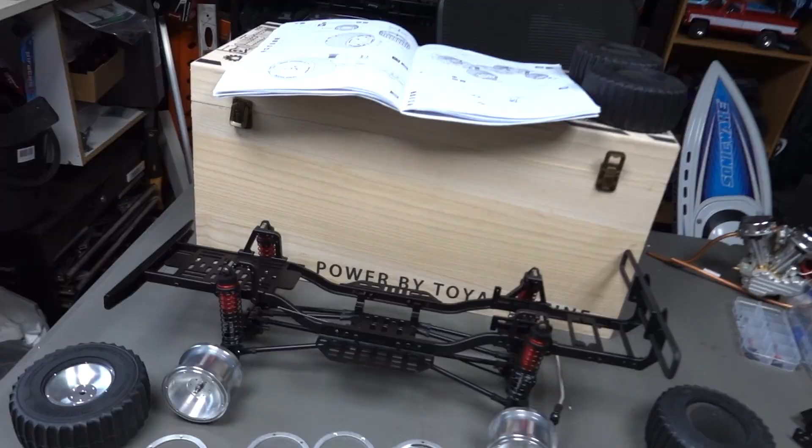Here we go, we're up to this particular part. Now in the previous video we got up to step 15, the last thing we did was putting the front bumper bar on. Now we have 4 wheels and tyres, and these are like those cool paddle sand tyres, and they are bead locks.

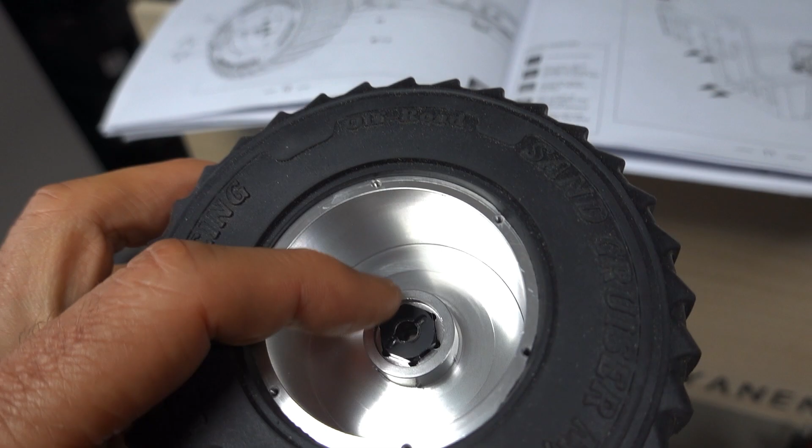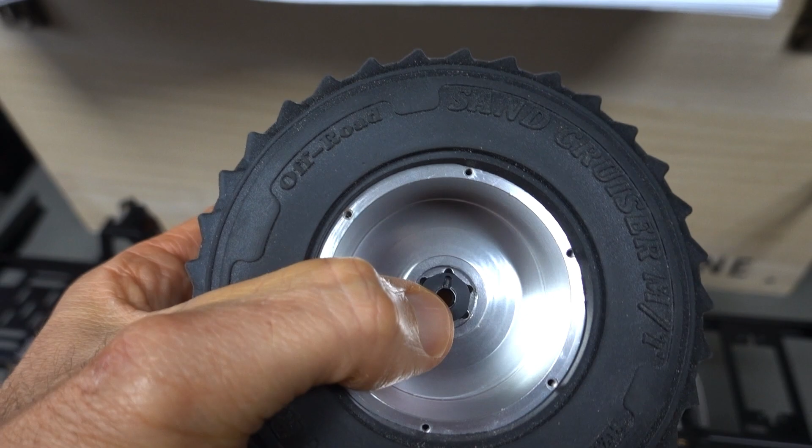Basically it says make sure it's the right direction, which it is, just like that. Now I was looking before and had a problem - that hex nut was such a tight fit in there that I couldn't, normally they're on the actual axle and you squash it on, but I found the best way I could do it was just take it off and push it in with my finger, and that's it. It does have a little grub screw that locks it in there, but once it's in there it's not going anywhere because that's in there for good.

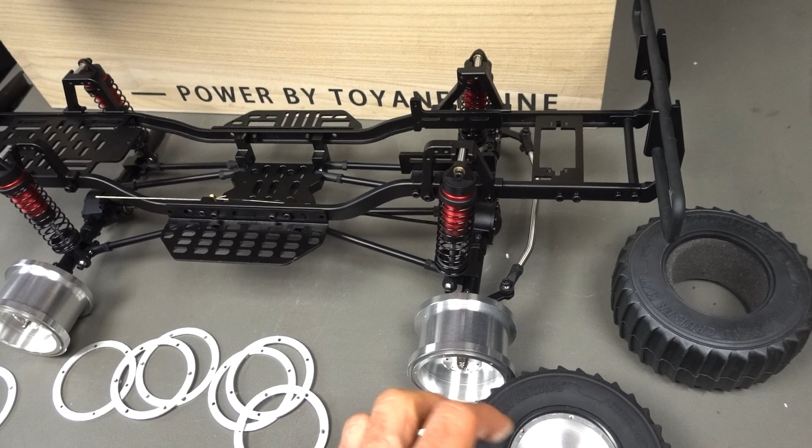What I'll do, I'll put these wheels and tyres all together. They're bead locks, very easy, not going to bore you with that, but just make sure that when you're seating it on there, this rubber fits in that actual lip there, and you just do like a star pattern so it's all evenly done up, and that's it.

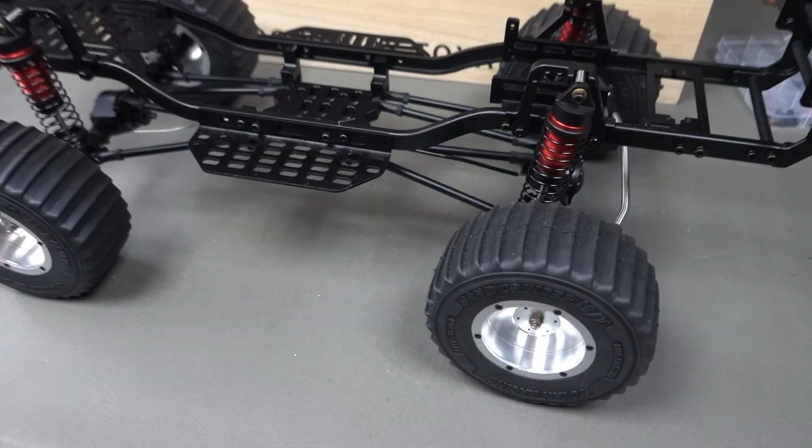So for all those, get up to this step, I guess which will be step 17, because we won't put those covers on yet, mounting the gearbox. Well, check out that, how cool do they look? Haven't put the decorative caps on yet - I'll leave them off to the end because I might want to take them on and off, and I don't want to be taking 6 screws out every single time.

These went together really well. Some bead locks have got many more screws on the outer and inner edges there. This one only has 6 on that ring. So they look really cool, I do love that old school dish kind of hot rod look.

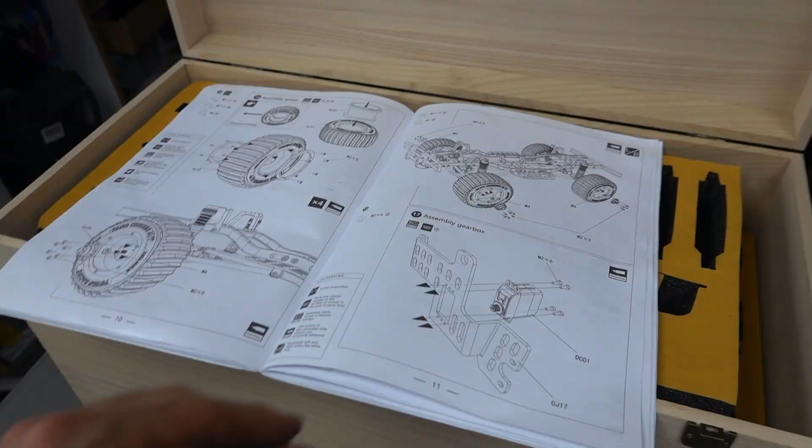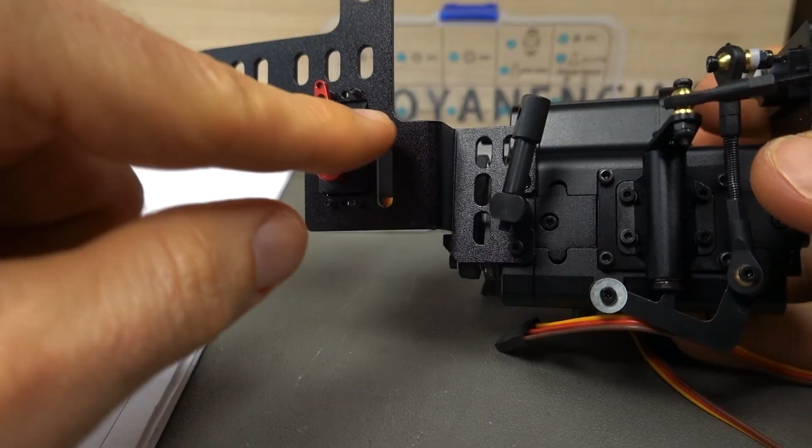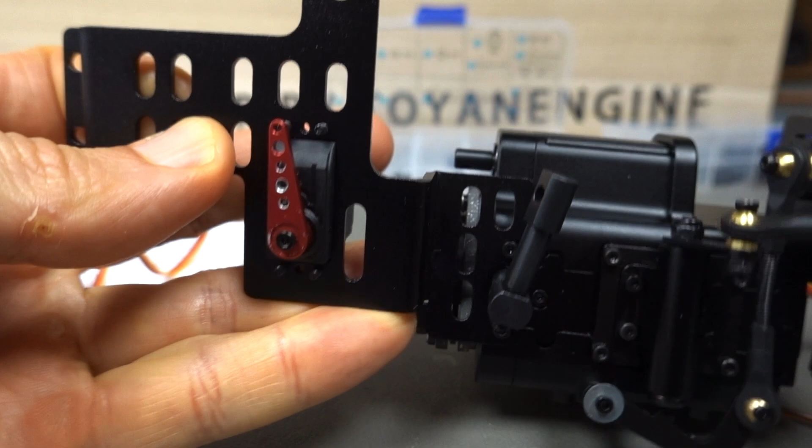Move on to the assembly of the gearbox, and that looks pretty sweet. Everything goes together kind of like one whole power unit, it seems. So let's get this part, screw that servo onto the side, and then we'll pull the gearbox out, which is pretty exciting. We have to attach this servo to this plate and then this plate onto this whole gearbox mechanism, so it's all one.

Now, pretty exciting part now, we are going to be attaching this whole unit into the chassis itself. We're just going to be using M3x8 countersunk screws, and it's just going to sit in on this plate. Pretty exciting time.

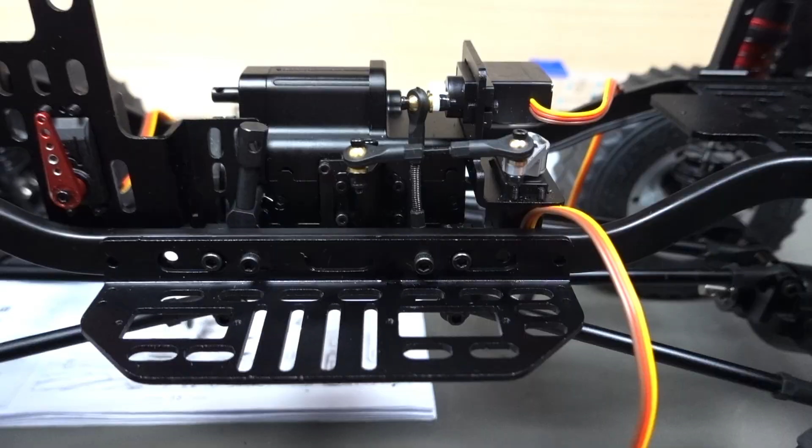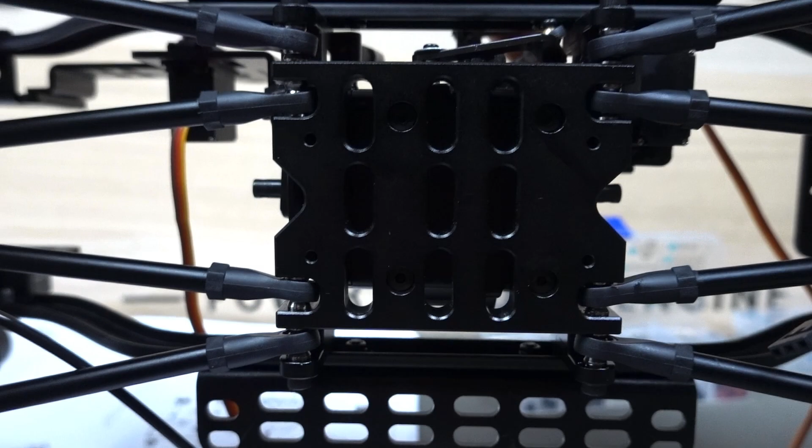And then attaching the motor. There we go, look at all that - it lines up beautifully, check out this. This is a separate part, so this whole unit is one part and it lines up with that front motor bracket perfectly. Super steady, super strong in there for sure. It's a massively thick plate at the bottom, like I said, around about 10 millimeters at some points thick. So there we go, all Loctited away.

Next up we got this awesome looking exhaust. Look at that, powder coated black from the factory. You're going to make sure you put the gaskets on as well, and they're just going to go in these little spots just there, and you're going to be needing 2 M2.5x6 screws, locking it away. They really fit well, look at that.

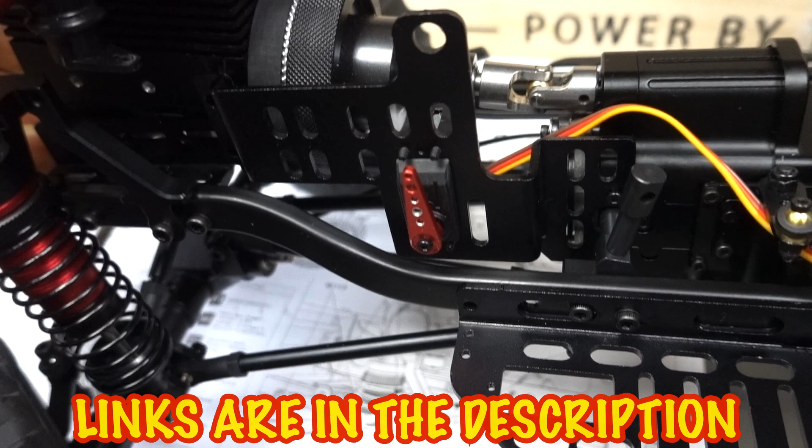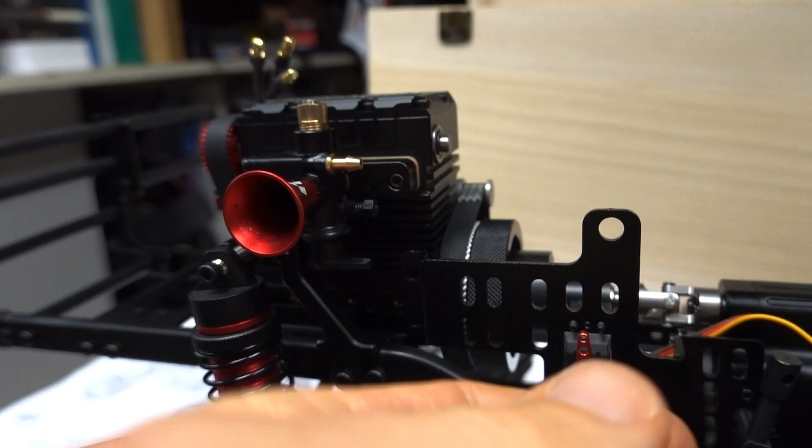Okay, we can't forget this drive shaft, so basically that goes in here. Alright, first step, push it all the way into the motor and all the way into the gearbox, and then just kind of spread the motor out a bit, and look at this - look at that fit. That is awesome, beautifully aligned shaft, and these 2 holes line up everything as well, so got to make sure these are aligned like that, and that's where we're going to put the other screws.

So I'll do that now, and that should be rock solid on this side. But man, that fit and finish is beautiful, look at that.

Well, there we go guys, it's all installed, and as you can see, everything spins nicely. One thing I'm questioning, it has a one-way bearing in here - I'm not sure why, like a one-way bearing in this clutch housing. Not sure, maybe it's just the way they wanted to give it direct drive instead of having like the telescopic style drive shaft. I'm not too sure, but anyway, it does work.

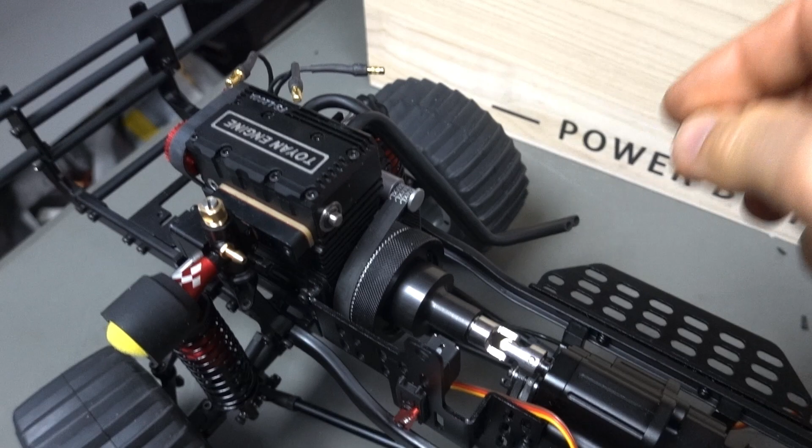You see, there's a one-way bearing, spins in that direction, but obviously the motor's spinning this way, so it's always going to be spinning that way anyway, so it's not like it's going to go in reverse any time soon - the neutral and stuff is all in the gearbox. And they are aluminium clutch shoes in there with a composite material and like a brake disc type of material.

Next step was put on this little decorative air cleaner. That's just a rubber air cleaner like that, puts on there and that's it.

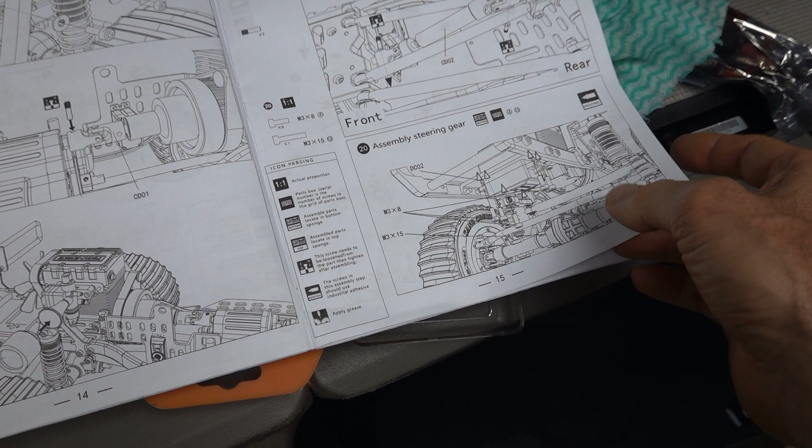Now next up, going to be installing the drive shafts. Now these pins are already installed in the drive shaft, I know because I was looking for those. And then the front servo, so put these front and rear drive shafts on. Oh, there we go guys, check out that - we do have a roller, as you can see.

Everything moves. Like I said before, we've got this one-way bearing, and I asked Toyan and they're saying it's just in case there's a shock in the system, in case it goes in reverse or something like that. I think it's like a safety net type of thing, but all good.

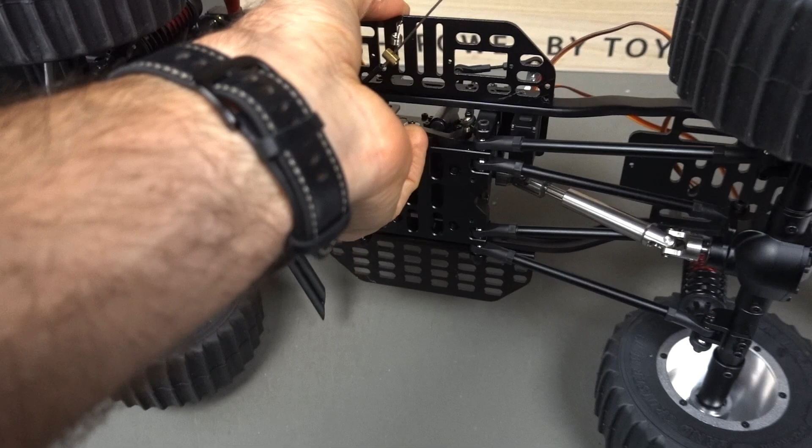So if you flip it upside down, you can see your telescopic drive shafts. That's it, we're all good.

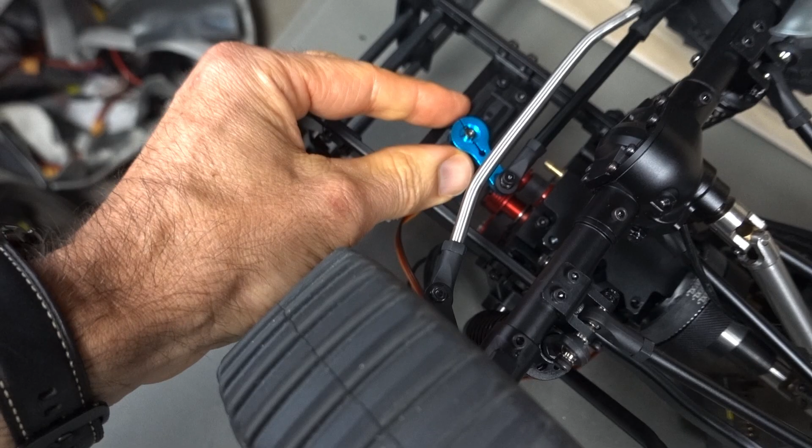My steering servo, I have a 20 kilo steering servo there, and look at that, funnily enough the aluminium housing matches the rest of it.

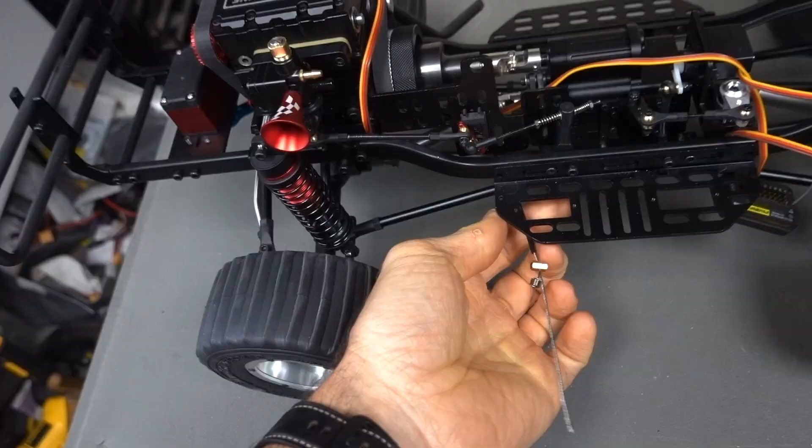Now one thing I was looking at is this is for your front diff, to unlock it and lock it. Now that's an option, so I've got it on my kit, but you still need to get a servo for that, so I've got to double check the servo I have. I'll figure that out later on, but I'll just put that there for the meantime.

But the main thing, the roller's nearly done, so let's get in there.

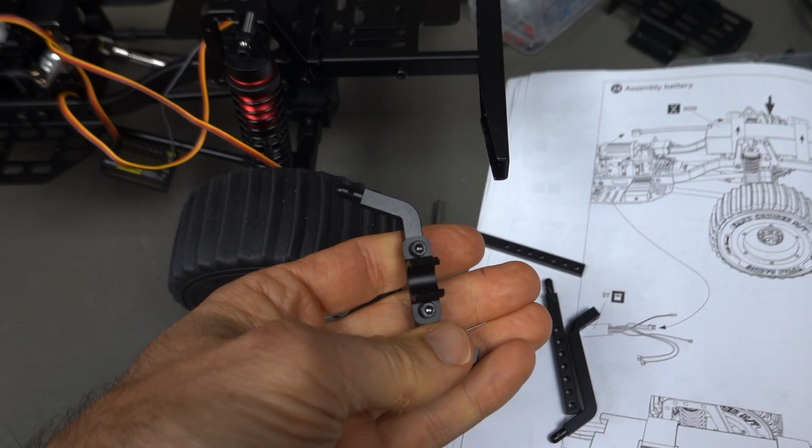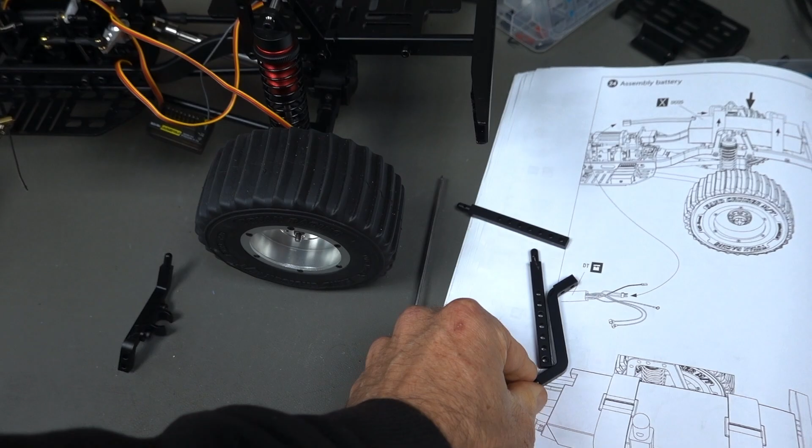Next up, I'm going to be putting on the body posts. These are nice, all aluminium obviously, and the front are these curved ones. Now this one here with this kind of cool looking attachment goes on the right side, and that's to capture that little breather horn, and obviously the other one goes the other side. So I'll put all those on, and then we'll put the fuel tank on.

That'll be pretty much it for this episode, because the next one I'm going to get all the linkages set up.

This is a linkage for the throttle, and it's pretty complicated. It's got this kind of spring loaded setup, like a spring, not a hard rod. It all works obviously, and it's needed because it's all on the one plane, because if it was solid you couldn't put the brake on without a bit of flex in there.

The brake movement is very little, I've probably got like 4 mil there, and pretty much when it's off throttle it's got a little bit of brake anyway, which I kind of like for a crawler. It's kind of like a drag brake on an electric car, so if you're going down the hill and let off the throttle, it still wants to brake a bit, which is what I want.

But yeah, that's that, that was pretty tricky, but that all got sorted. There's all the mounts, there's everything you need to see, but it's all good, all works.

So when it's upright like that, pretty much it's kind of half throttle. But yeah, that can all be fine tuned later on. Let me get all that done.

Fuel tank, body posts, and that'll be pretty much it for this video. And quickly, here's the fuel tank. Nice setup.

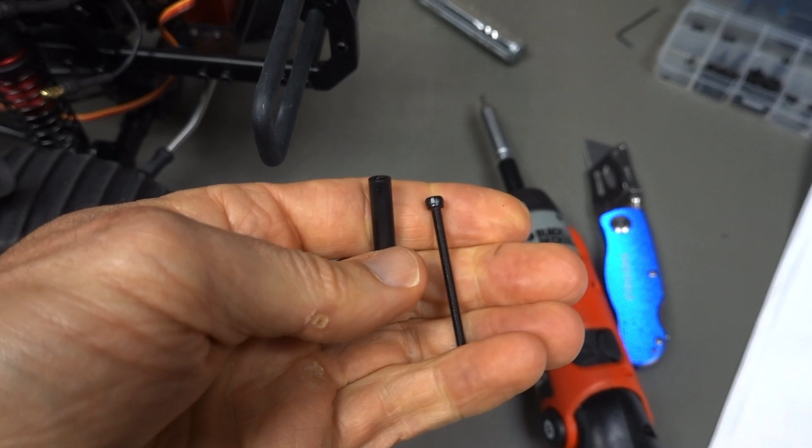It's a very unique looking design, isn't it? It's going to go on the side here, and bear in mind these screws aren't in the plastic containers, they're in this little bag at the bottom section, so just check that out.

Well, would you look at that, guys?

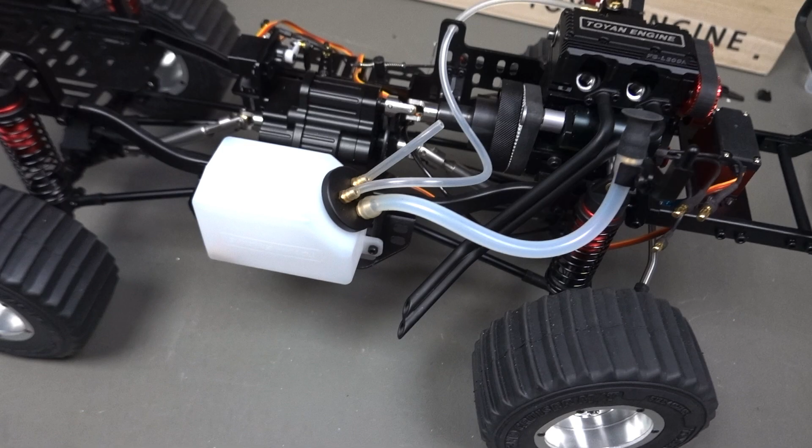Everything apart from the electronics is all done. So it's a roller technically. It's got to get the spark plugs in, but that's all got to do with the electronics.

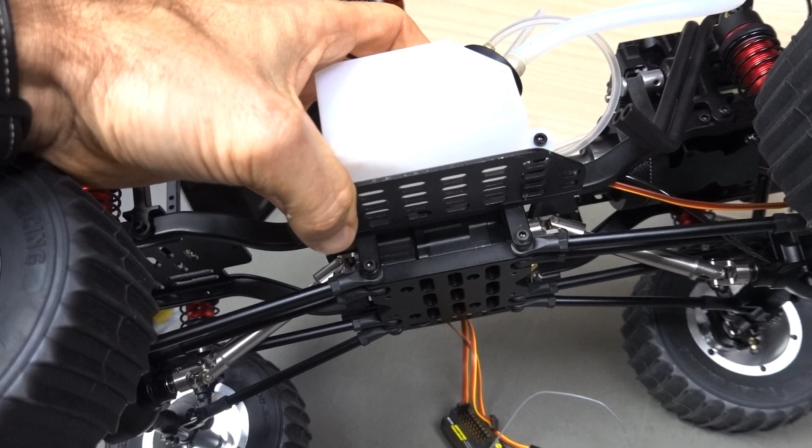The electronics board, the starter motor is mounted down below here. I've just taken that off, it's a separate plate, it's this guy right here, and they kind of sit under, but the brushless wires don't actually reach, they kind of miss by like 30 mil, so that's about an inch or so that's a pain, so I've got to figure that out.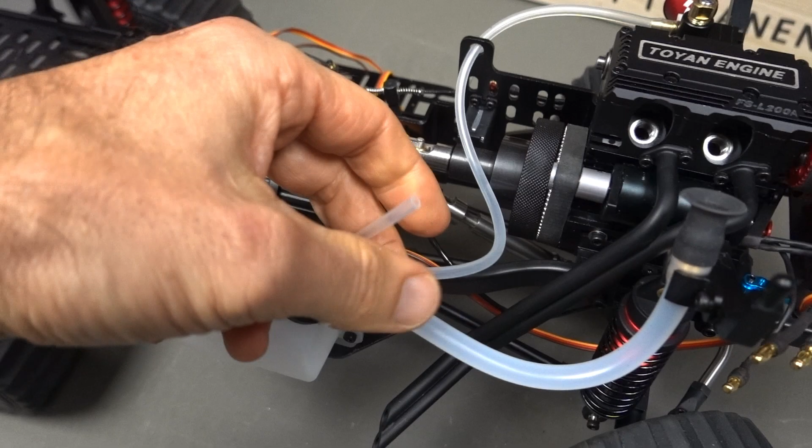But the fuel tank is nicely situated on there. You have this pipe that comes up here, sits in there, breather, and your fuel supply comes in here, feeds through this little hole straight into your carburetor.

That's it. Now, silly me, when I was doing these shocks, I put these in here and had to move them over to where they're supposed to go. This channel locks this in nicely because it's held in by one screw, but it's got a channel on either side that locks it in. Same as with the front as well, so that's it.

So you can see this cable, there we go. Make sure, double check all that later on.